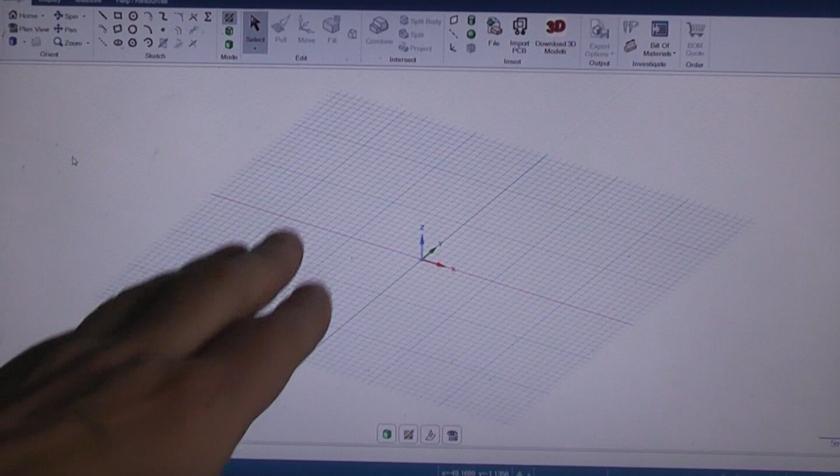When you open the file, you're going to come to this page. Go to File, then New, Design, and it gives you this grid pattern at an angle, which I find totally useless. So I hit Plan View, which gives me this.

In this case, let's go ahead and model one of the arms on this TV robot that we've been talking about. You're going to need something to measure with. I use a caliper. Maybe if I turn the room light on, that would help see the part better.

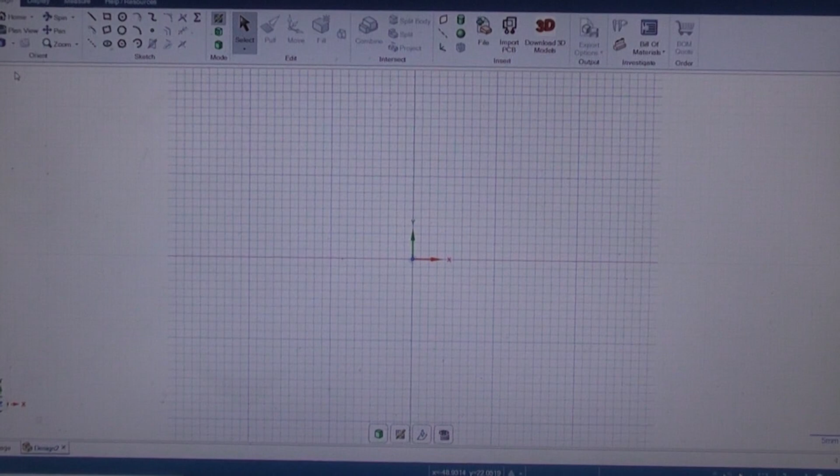So let's just go ahead and start with a diameter reading here. It's about 24.5. So I'm going to go up here into this tools section, grab the circle. Doesn't matter where you start. I'm going to go there and say 24.5, this is millimeters in this particular case.

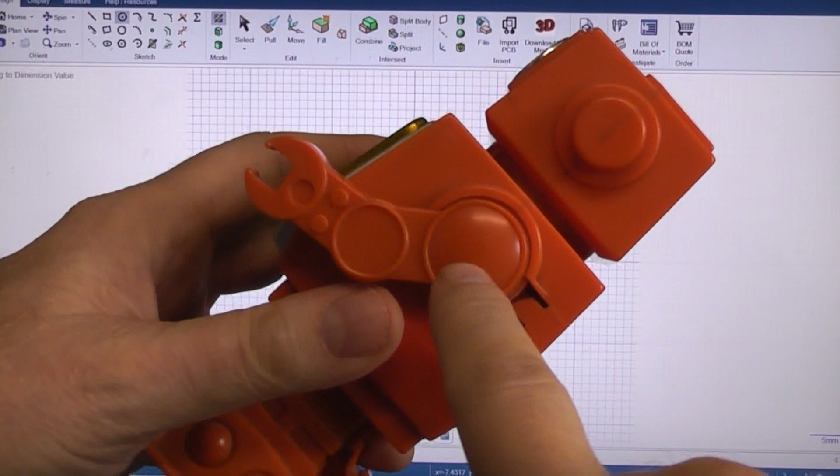The next thing I want to know is the center distance from this circle to this one, roughly, since I'm just trying to make an approximation. About 24 millimeters. So let's grab the line tool and just tell it to go 24. I'm hitting enter to enter that stuff. Now I'm going back to the circle tool.

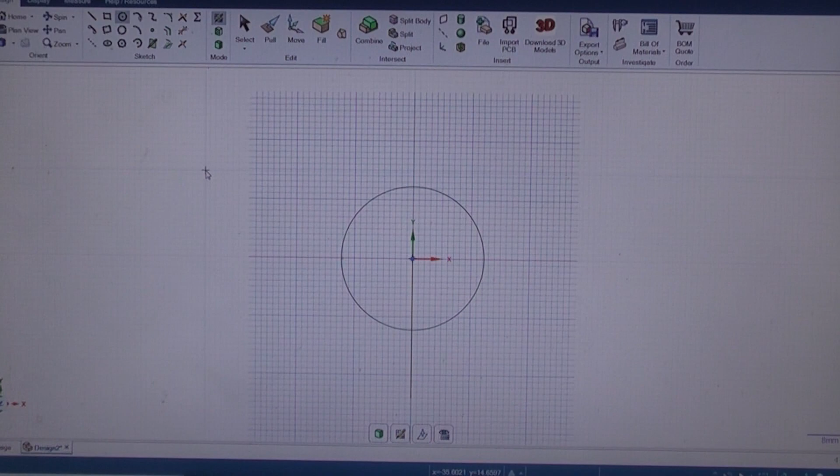So you start by doing a flat line drawing. The diameter of this elbow joint is 19.5, roughly. So I'll go to the end of that line we just made and go 19.5, like so.

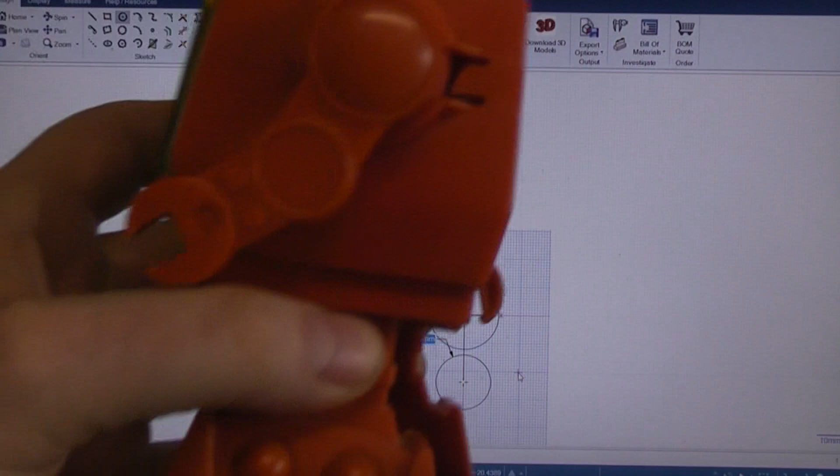The next main detail on this thing is going to be the claw. So let's figure the center on that. It's about 25, and you could get precise on this angle here by taking a measurement and intersecting the two to get them to hit exactly, but I think I'll just guess at it because I don't particularly care if the cosmetic angle is exactly right.

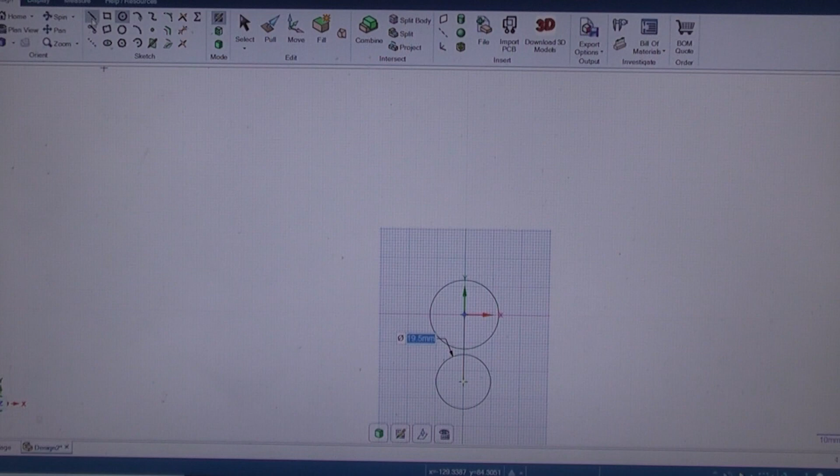So I'm going up to the top and selecting the line tool again, and I'm just going to draw it off down. Let's see what it looks like. Like that, let's just go about there. 25, okay.

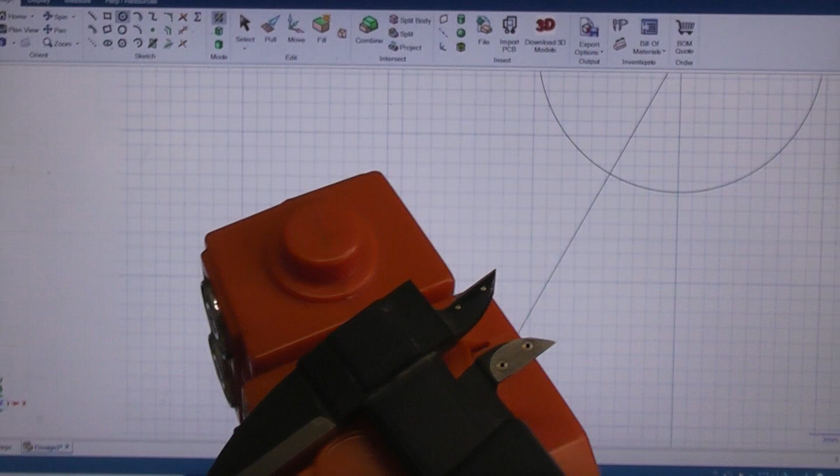Let's go back to the circle tool. And what diameter is the claw going to be? It's about 19.5, about the same as the elbow was. 19.5, like so. So now we have our basic shapes.

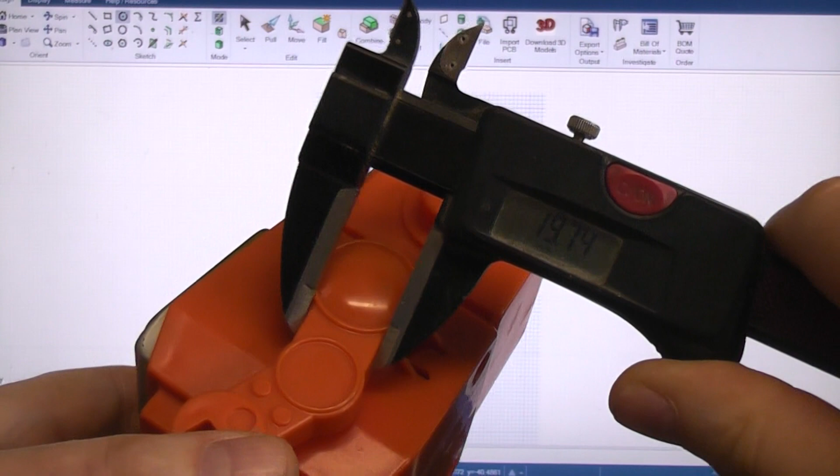Let's see how wide the arm was between the two circles. It's about 17.4, 17.5. Half of 17 would be 8.5.

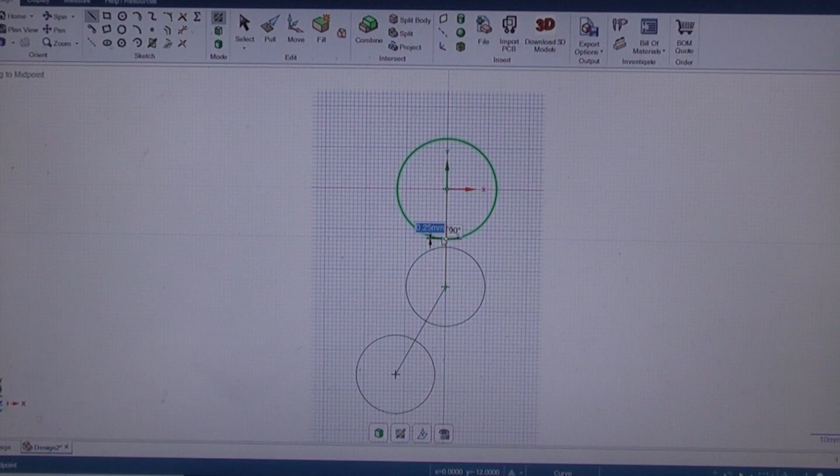So let's go 8.75. What we're trying to find here is, coming off that line, I'm going to take half of that, which was 8.75. That gives me a distance there. And I'm going to do the same thing over this way: 8.75, like that. So now I know how wide that arm is going to be.

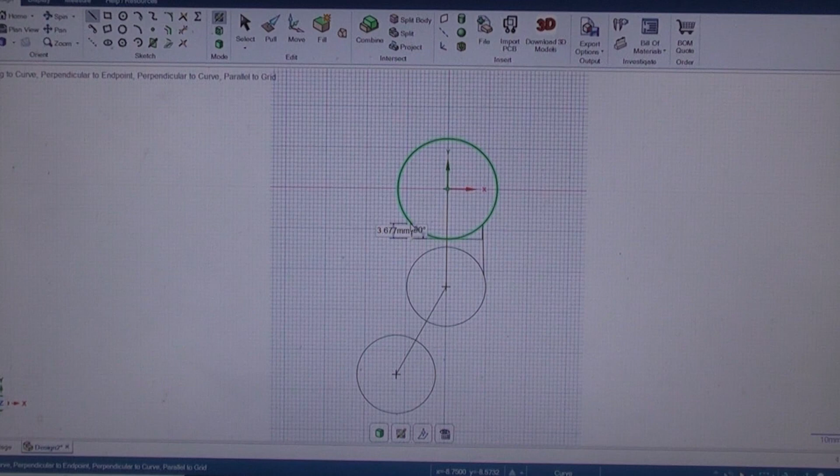I should be able to go straight up and intersect the circle, take that and come straight down and intersect that one. Good. Take this one, straight up 90 degrees, and straight down like that.

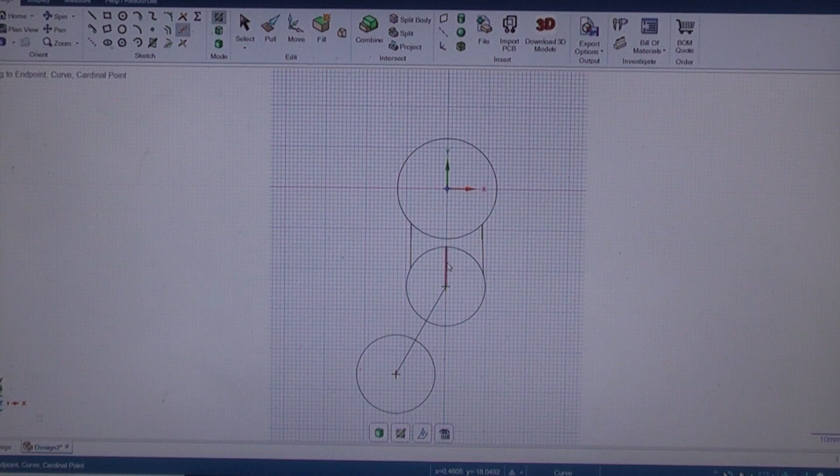Now you can do some cleanup. You can take this tool right over here in the middle of these last three, you can see it's trim away. So I can get rid of these measurement lines, we no longer need those. Now we're starting to get this, and I got a duplicate line here I can get rid of.

Boom, there we go. And let's do the same thing going down to the claw. So how wide was that going down to the claw? It's about 15.5, so 15 would be 7.5, so 7.75.

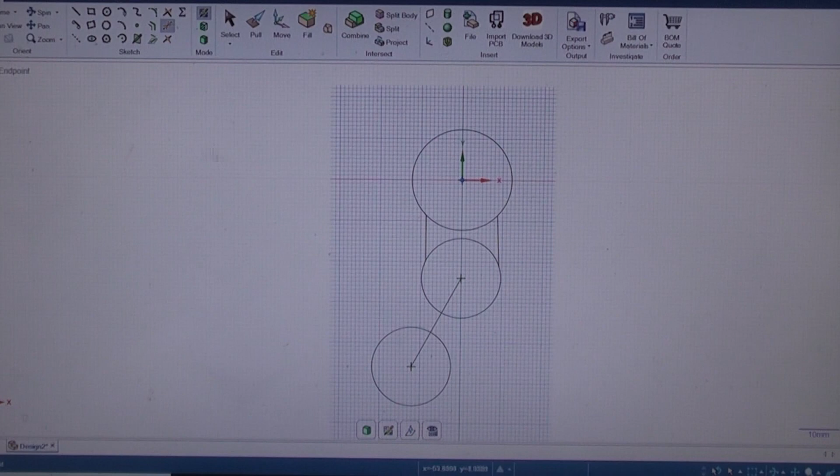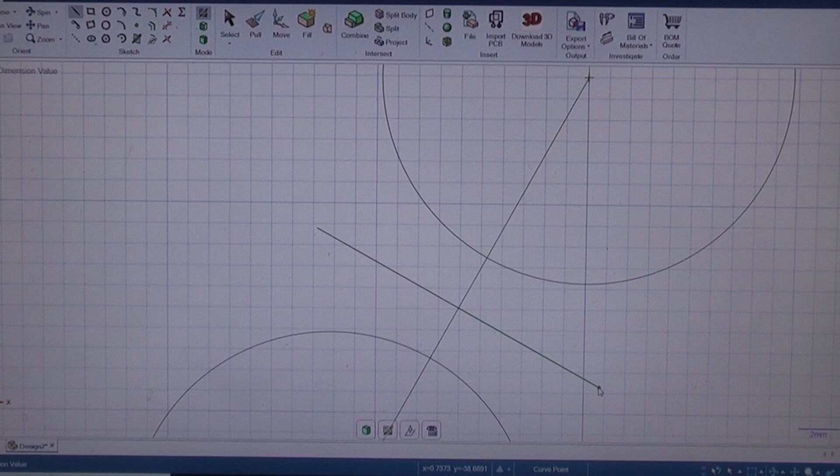I'm grabbing the line tool again, and I'm just going to take this and go at a 90-degree angle off there, 7.75, and I'm going to go from this center and do the same thing in this direction, 7.75, and then I need a 90 degree up to there, and let's take a 90 degree down to here.

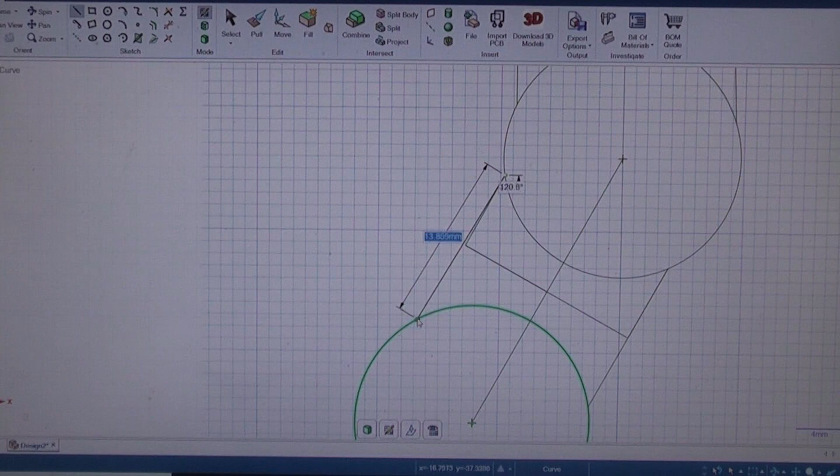Go here, see, you just start with a flat drawing. If you're trying to imitate something, you spend more time getting it right. If you're creating something new of your own design, you don't have to spend so much time getting it right, because you're not comparing it to anything else.

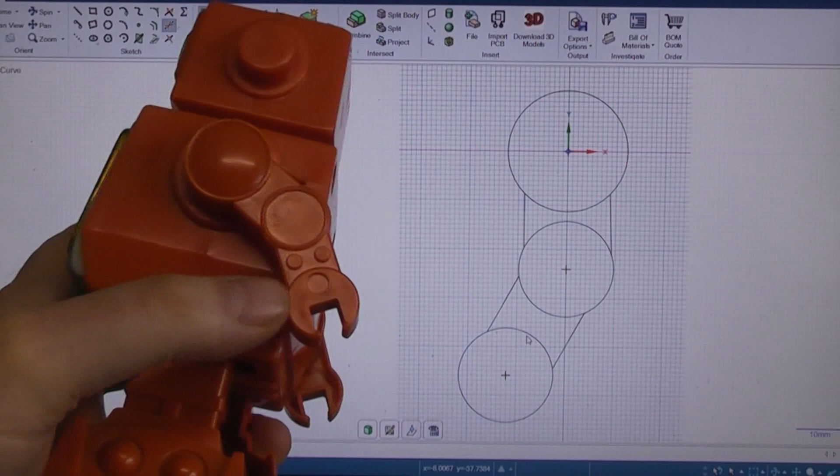So I can clean up all of this, like that. Now we have the basic arm design. We could add this claw cutaway, so let's see what that is. The micrometer says it's 7.8. Let's just call that 8.

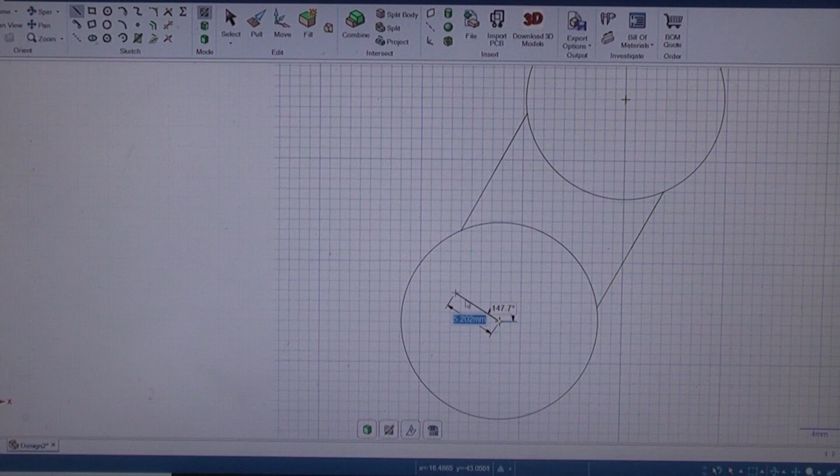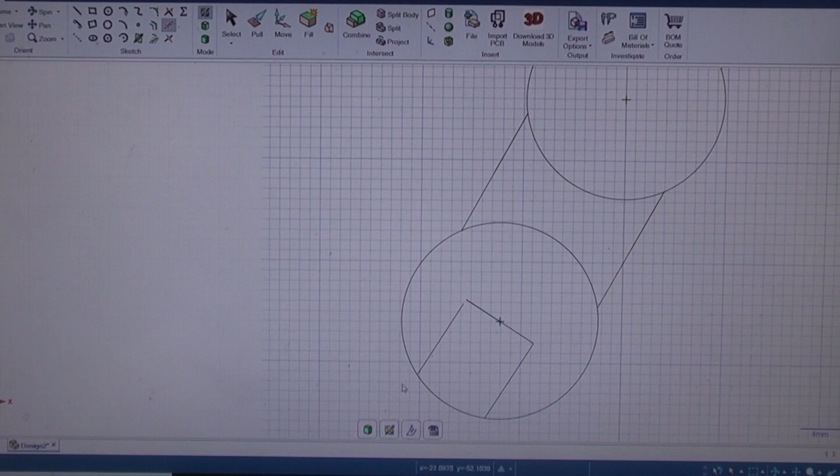From the center, if we do that, then eight, so we'll go 4. Let's go 4. Look at that, and then come straight out at 90, like that, so you can get your degrees that you're going there. There we go. Then let's take the remove tool and open that up. Boom, just like that. So we could do more now.

We could add some of the details, but before we do that, let's just go ahead and extrude some of this. So I clicked out of where we were there. I hit mode and I hit select, and now we're down in this area. Apparently I have a line not touching. I think it's right there, or this would have been gray.

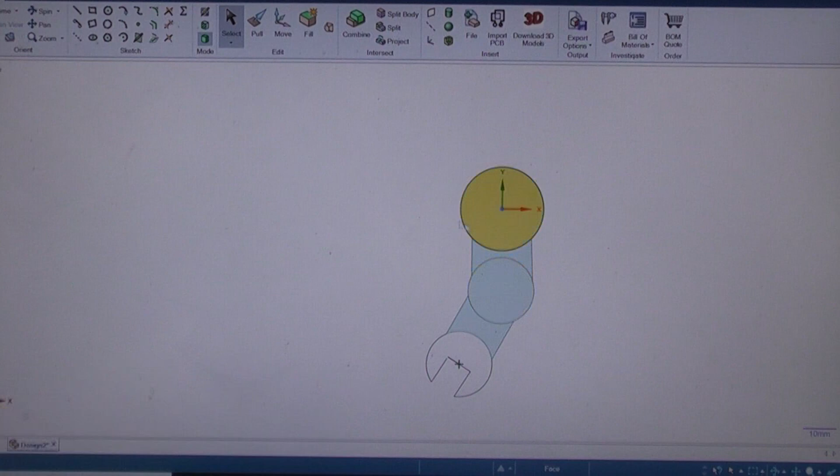Well, what the hell, let's fix it right now. I'm going to use this back button, clear up in the top, there's a back button. Yeah, see, there's where I screwed up. I didn't connect. You got to make sure everything is watertight and connected. Okay, there we go. Anyway, let's go back where we were.

I've just clicked on this upper shoulder circle. I'm going to take this spin tool and rotate it just a little. Then I'm going to turn the spin tool off and come over here to pull, and now we can extrude that.

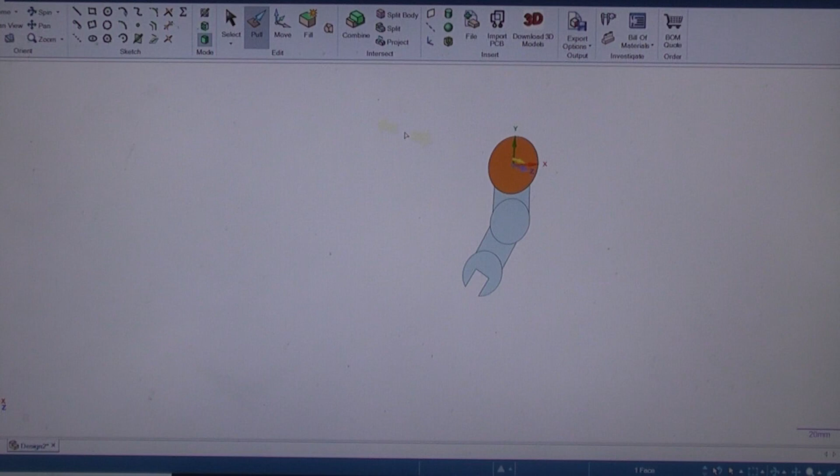And the question is how much do we need to extrude that? It looks like it's 10 millimeters. So let's go ahead, there's arrows pointing, got this here. I'm just dragging my mouse this way. Went up to 13. I don't care what it goes to because I'm going to type in 10 and hit enter. Boom, you got 10.

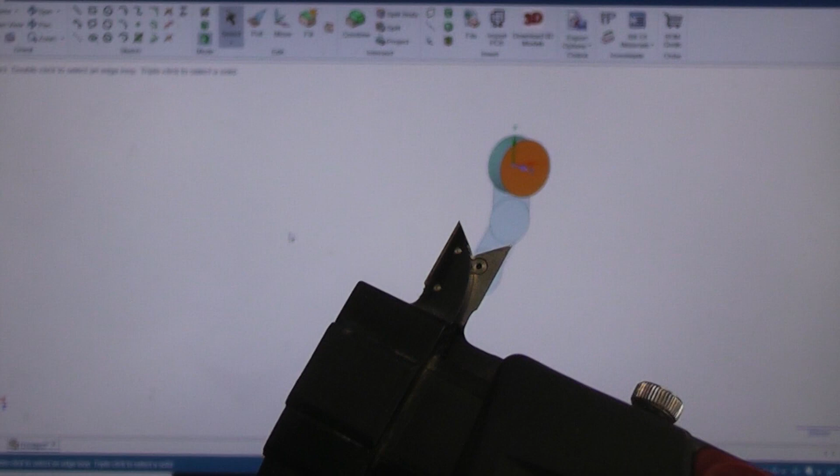And the arm connection is definitely less, in between the arm parts, 8.5. So again, I'll just click on this area right here.

Let me close in maybe so you can see better. Click on that, I'm going to go up to pull. I'm going to say pull, 8.5. So now what's at a lower elevation? I'm assuming...

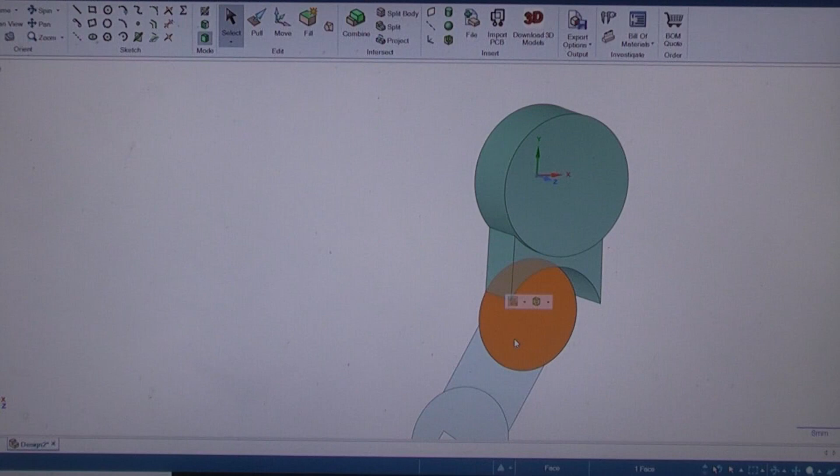We're going to add some detail to the arm. So actually, I can pull that elbow at 8.5 also, and they'll both join together, like that.

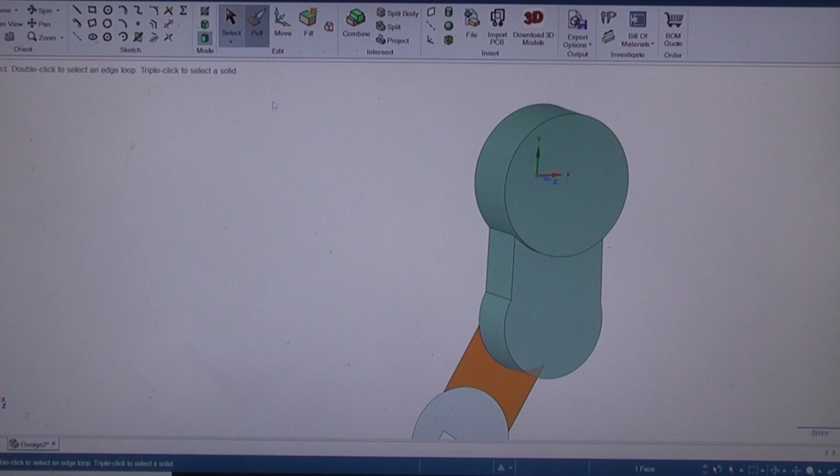And do the same thing down here, 8.5.

Let's stop there for a moment. I'm going to select this whole thing. I'm going to come over and hit this box to get everything flat, coming back up to circle.

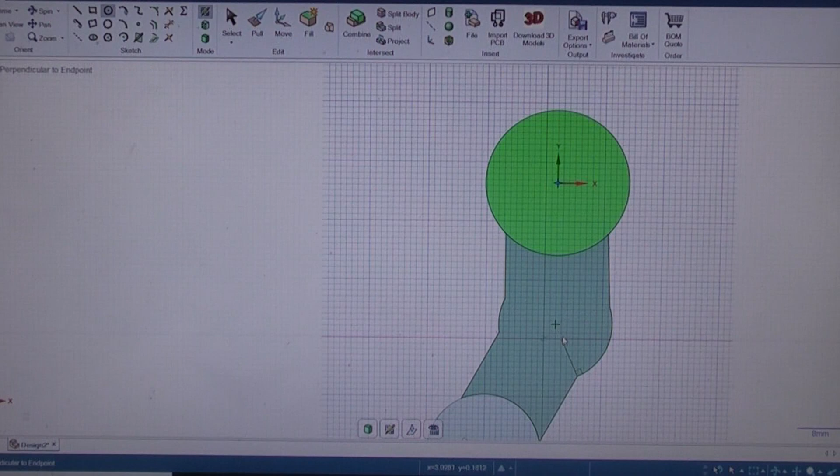Grabbing this, it'll center itself. I'm going to bring this out because we have this ring in the elbow, as you can see, and it's going to be less than the 19.5 that we initially had.

Let's just see what 18 looks like. That looks good. And we want another one, so let's go 16 maybe, see what that looks like. That looks good. That's going to add some detail to this part.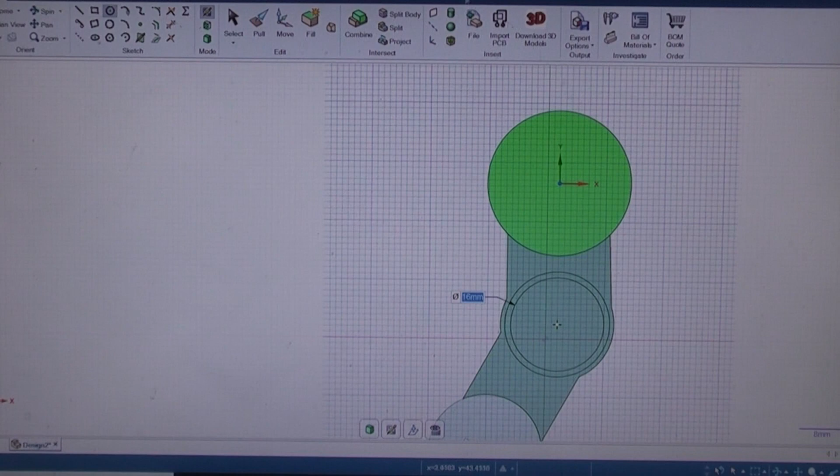We're going to extrude that out, so let's bring this up. I'm going to highlight just that part. I'm taking the spin, rotating it enough so I can pull, going over to pull.

Now let's pull that out, let's say 1.5 millimeters. We just want to add some relief. That's actually too much, let's say 1 millimeter.

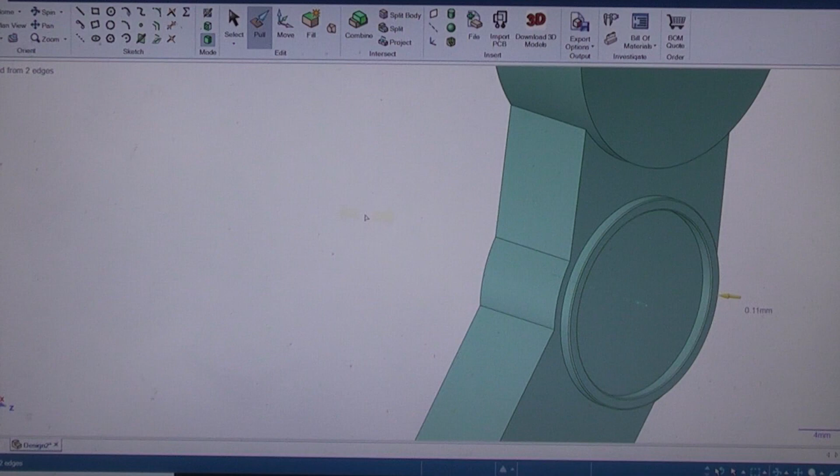Now to give it a more rounded look, you click on the edge of it instead of on the flat. See, if you got on the flat, the whole thing turns yellow. Get on the edge, and I can actually get on the inside edge also at the same time. Now when we click on the pull tool, it shows I can push in, and if I push in, I can round everything over. In this case, I'm going to go 0.5. Boom, like that, and now we have a nice rounded view there.

Now we should do a similar thing up here on the top. I clicked on that surface to select it.

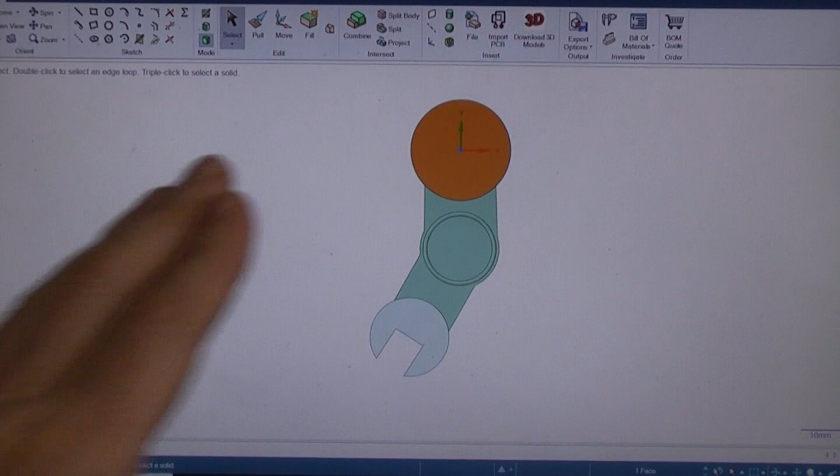I'm coming down here to move that whole thing square so I can look at it straight on. Let's make this bigger, and we're going to add a ring to that as well.

We'll start by noting the outside ring was 24.5. Let's go something like... gee, I don't know, 21. That's a little too hefty. What's 22 look like? 22 looks pretty good. Let's take that.

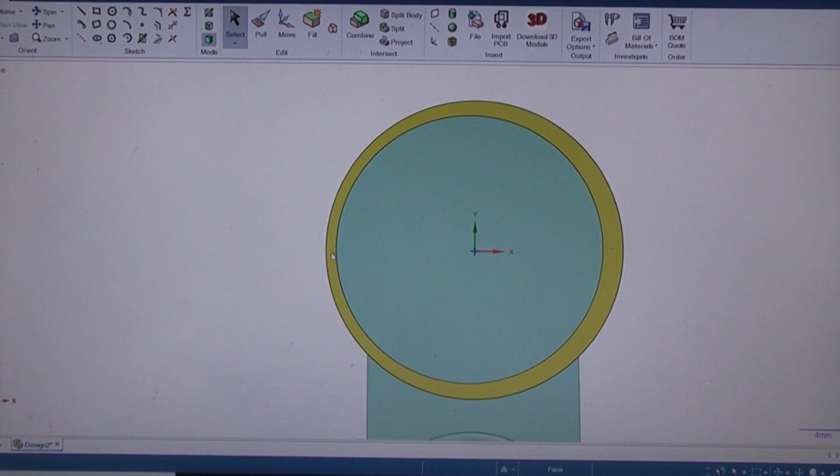When we did the depth, I think we went full bore already. So I'm going to select... ooh, I'm not centered, am I? Let's go back, I wasn't watching what I was doing. I don't know how I got off center. Am I centered? Yes, okay.

So let's go back to 22. That's better. Take that. I'm going to take this inside part. You know what, I want to dome that.

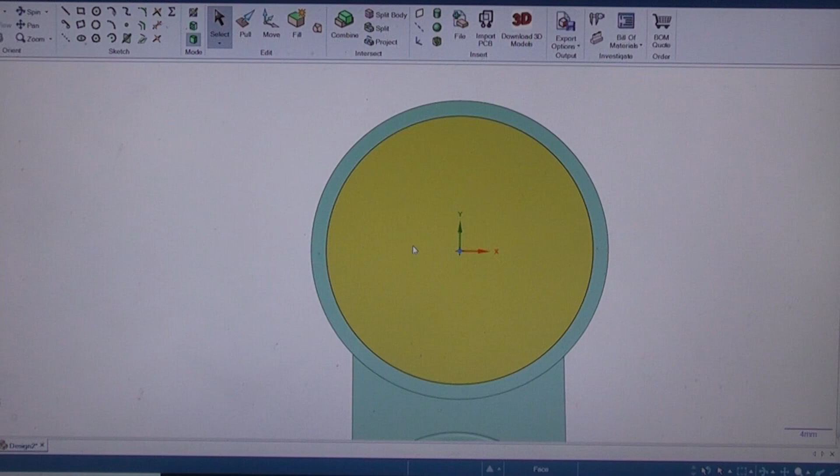So I had that inside one, we're back on the sketch. I'm going to select the circle again and do another circle just inside that. What did I say, that one's 22? So let's go 21.5. I need just a ridge there.

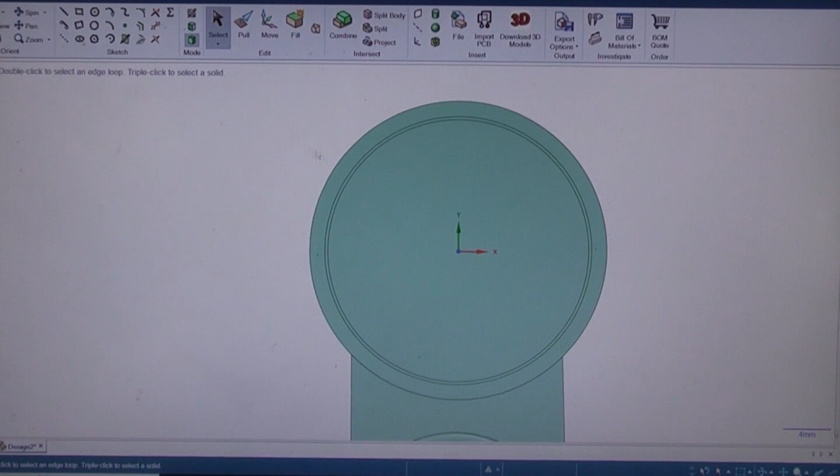Then I can select the center and let's go ahead and rotate this a little. Let's just grab... I'm clicking out here anywhere to unselect. I didn't get the spin off. I'm clicking spin off, clicking out here just to unselect.

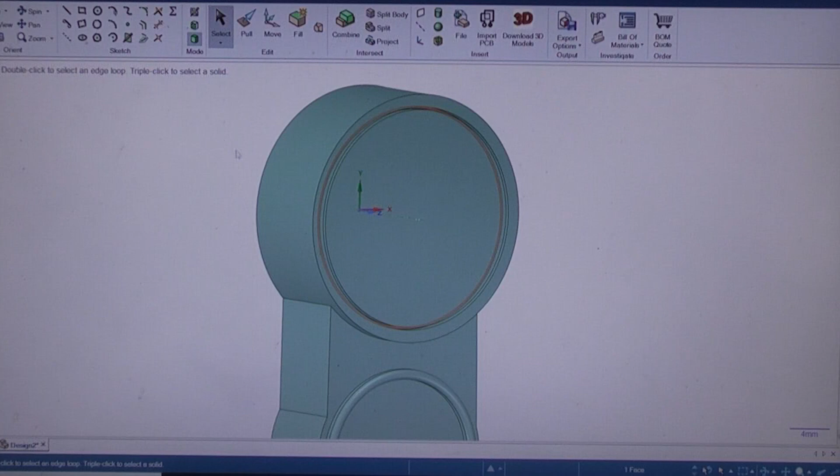Let's grab this inside edge. In fact, let's have more fun with it. Let's grab this whole little piece in between that we just made and pull that in, oh, I don't know, at least one. If we don't like the way it looks at one, we'll add more later. So what we've done now is pull a ridge in there.

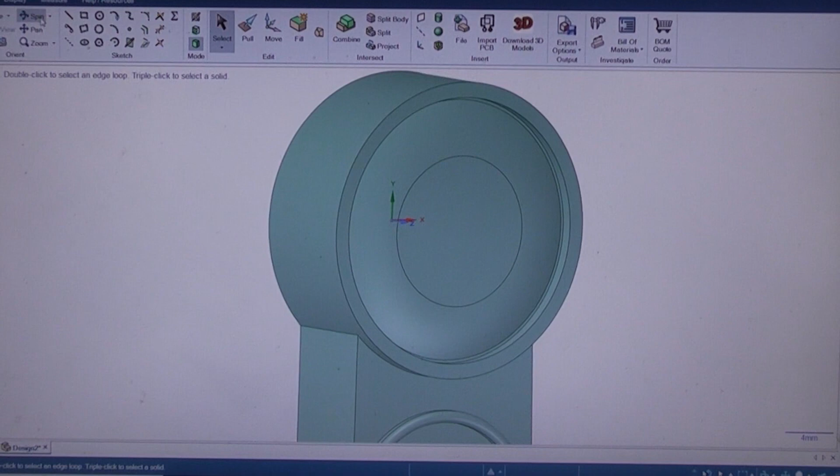Let's select this edge. What I'm trying to do is round this, because this thick part here is domed. I've grabbed that, there's a little arrow pointing in, I've got a little arrow here, I'm in the pull mode. I'm going to push in, and it's going to keep pushing in, until it looks kind of rounded. Couldn't go as far as I wanted. So now you can see we've got a domed round part in there.

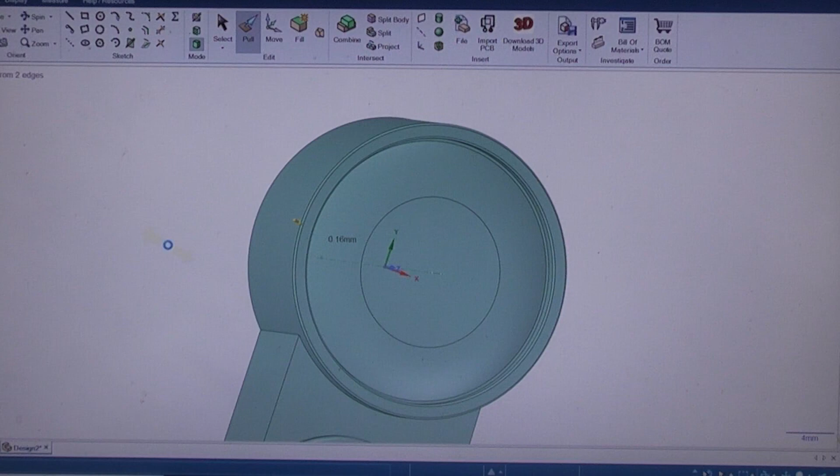We've got these outer ones which still have a very coarse edge to them. So let's grab that outer edge, and by holding the control key down, I can select this inner edge, and then let's round those by pushing it in. Something like that. So now we've got a rounded edge, we've got the domed edge, we've got this edge.

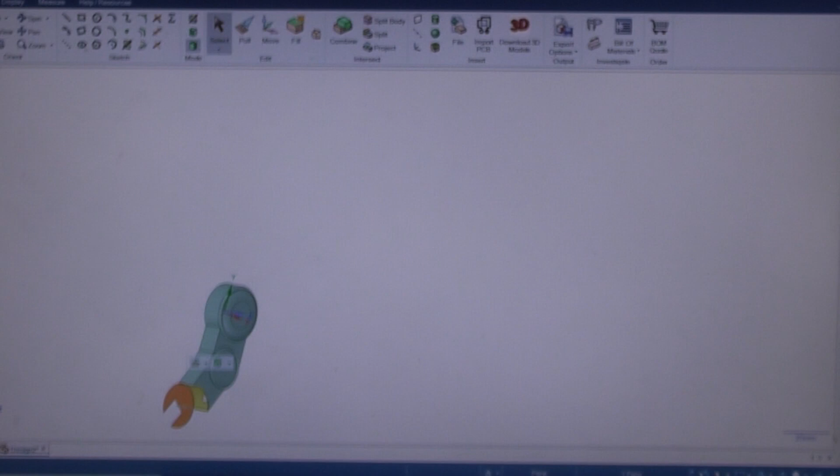So that means we could come down to our claw. Now it looks like the claw sticks out. It's a little bit thicker than the arm part was, so we'll call that 10. So let's go ahead and select pull. We've already selected it, let's pull that out, 10. Boom, like that. That's looking pretty good.

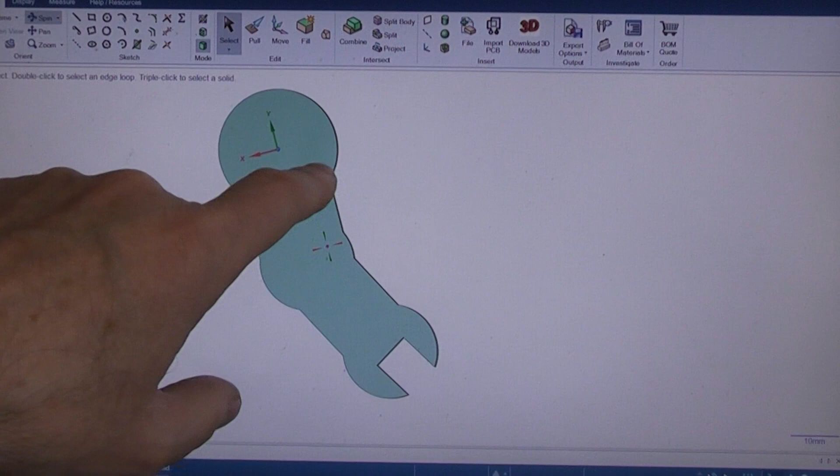I'm hitting spin so I can take you guys around the part. So right now it's a solid part. If we didn't want it solid, if we wanted a hollow part, I would redraw this outside line in here, but I would make it whatever wall thickness I wanted. Let's say I wanted it 1.5 millimeters thick, then I'd go in with a circle that's less and straight arms, and then I could go back and pull that in and make it hollow.

In this case, I'm going to go ahead and leave it solid. Since this is going to be an FDM 3D print, I can just set the infill at any level I want. If I was going to make this part on a resin printer, I would want to go ahead and make it hollow, since resin printers make their parts solid.

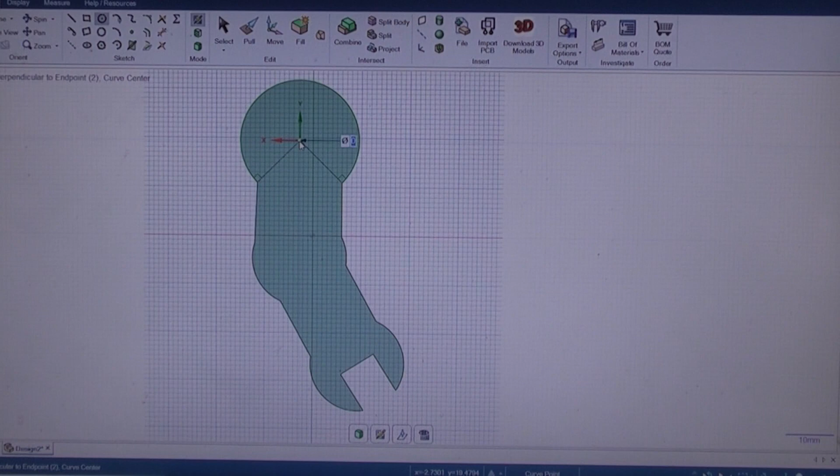But I need a way to connect this. So let's put a 10mm hole in this so I can hook some sort of axle to this arm to hold it onto the robot. And let's just go ahead and pull that in arbitrarily, let's say 5mm, about half the distance of the arm.

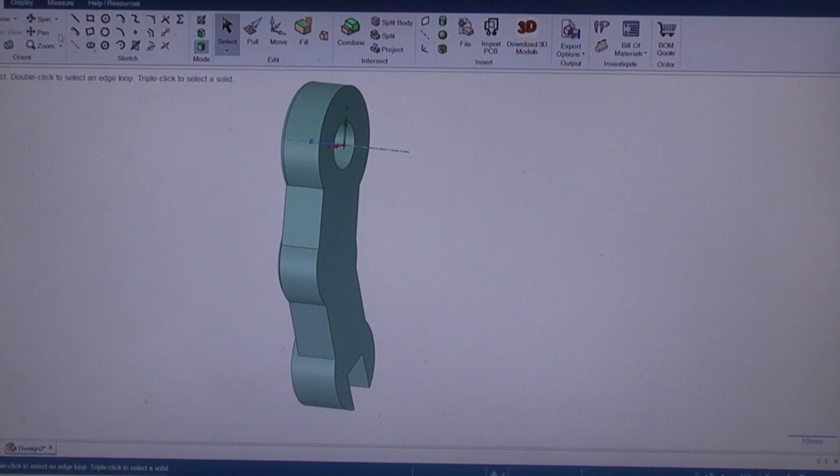And I'm hitting the spin button so I can spin it for you. So now you can see I've got a place where I can run and glue a pin into this whole arm part. And if I wanted to add the more details that are supposed to be present on these parts, there are a couple little circles and then the one circle in the claw. Let's select this part here.

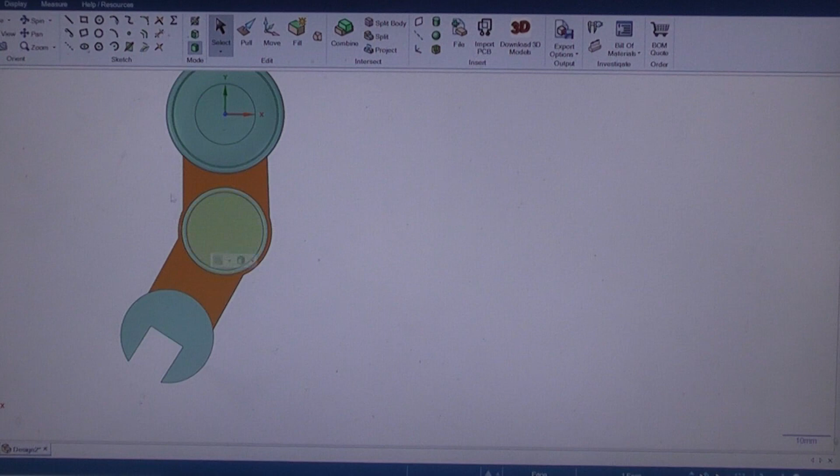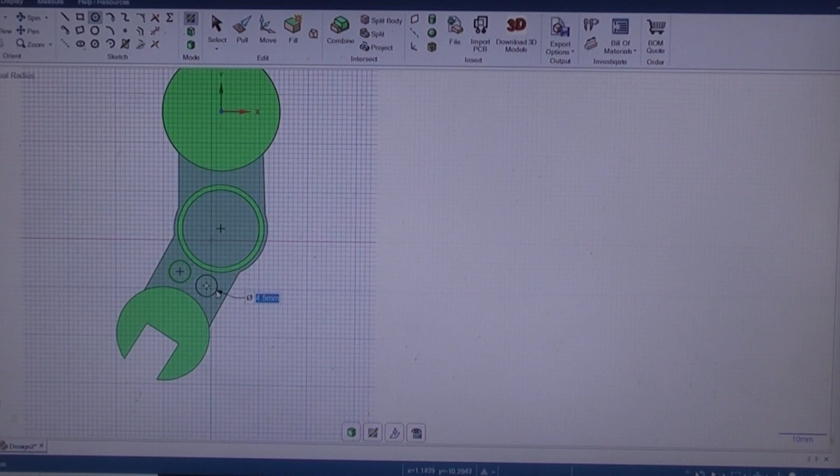You could measure and get exactly where you wanted to add those other two circles, or if you just want to be artistic, you can guess at something, like I'm going to do right now. Let's just say 4.5, and then your other one, 4.5.

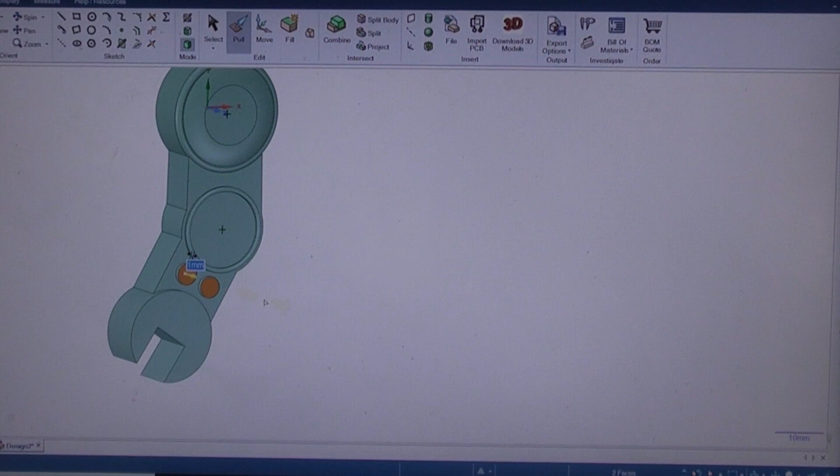So I've drawn those two circles in. I've gone back to select mode. I can now select those two circles. In this case, they protrude outward on the arm, so I'm going to rotate the arm a little to make it easier to see when you extrude. Going up to pull, they're both selected. I'm going to tell it to bring them both out 1mm. Maybe I'd like more, but let's go ahead and leave it at 1mm for now.

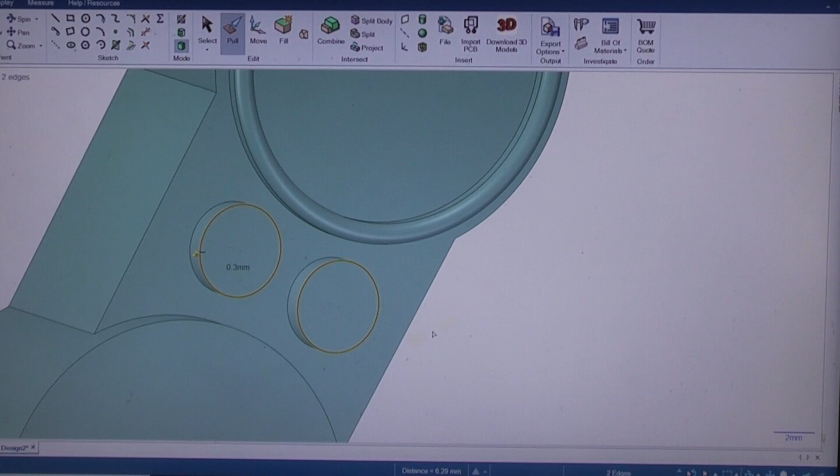Now if you wanted a rounded edge on those, you can come up and just hit the edge of them. See how the edge is now highlighted? Then if you go back up to pull, you can see there's an arrow pointing in, so I'm going to push on my left mouse button as I go in. I can select how much I want to go in. Let's say 0.3mm. Boom, like that. That's more than I would want, but in this case I don't care.

And let's click on the arm. I'm going to click on this box over here to get the whole thing square on, like that, because there's this circle in the claw down here, so we can take that.

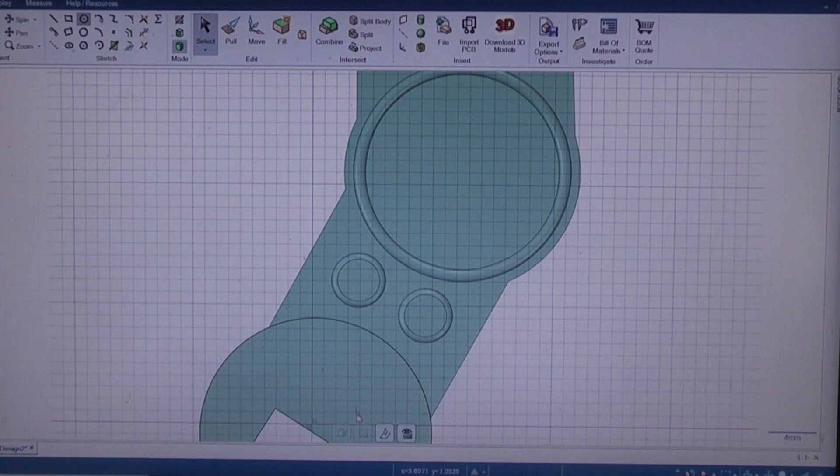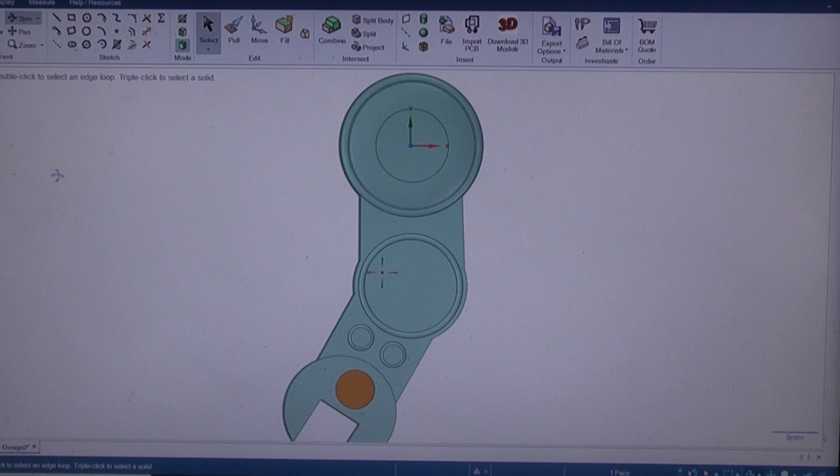You'd find the center - of course, you could measure to exactly find the center - and the circle is kind of big. I'd say it's about there, can take that. I clicked on select, I clicked on mode, I'm clicking on that, I'm hitting spin. So now I'm pulling on pull. In this case, that hole goes inward, so I can go in, let's say 1. I think I'd actually probably go more like 1.5.

So now we have all of that detail on there. And the robot in this case actually has two little divots down here, so I could select the surface, add the two divots, and extrude those on.

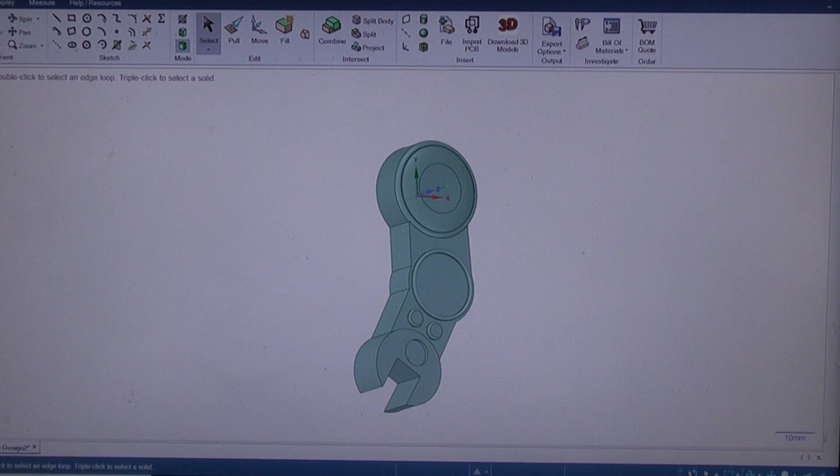You get the idea. When you're all done with your drawing and you're happy with the way everything looks, you would go up to File, hit Save As, and just like in any other program, you would look for where it is you want to save it, type in the name you'd want to save it, and the first file type it's going to save it as is a DS mechanical file.

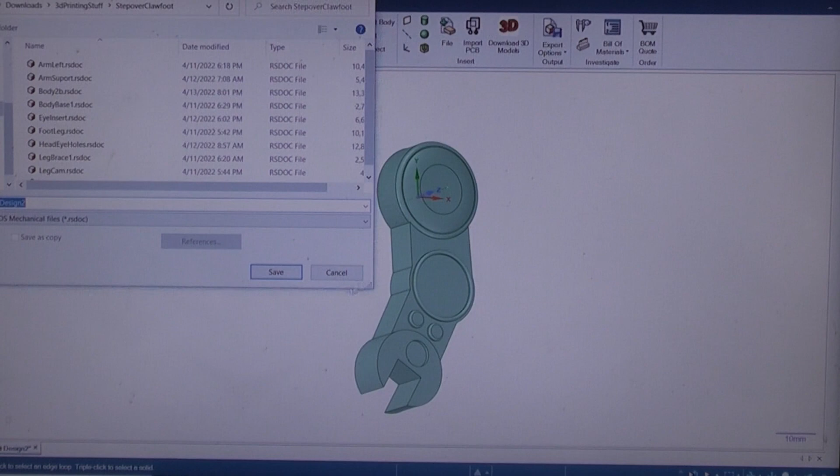Just hit Save, then you can go up and do a save again. Or you can just go over here under exports and go down to STL and save the file as an STL also. So once you have it saved as an STL, I'm going to close out of here.

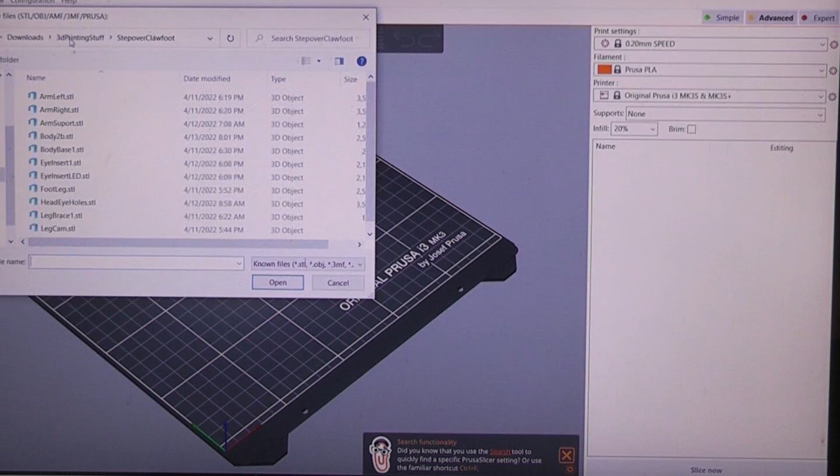You would go into your slicer. In this case I'm using the Prusa slicer because it'll work with any printer and it's just about the best slicer out there. And in Prusa you can come up here to this box, click on that, and you can find what you're looking for. You got an arm - there's an arm, it's laying there.

As you can see, in this case, because I'm not particularly worried about layer lines and stuff, I normally just print at the 0.2 speed setting in their slicer. It's quick, 20% infill, it's going to be a lightweight part. You would hit Slice Now - boom, just like that.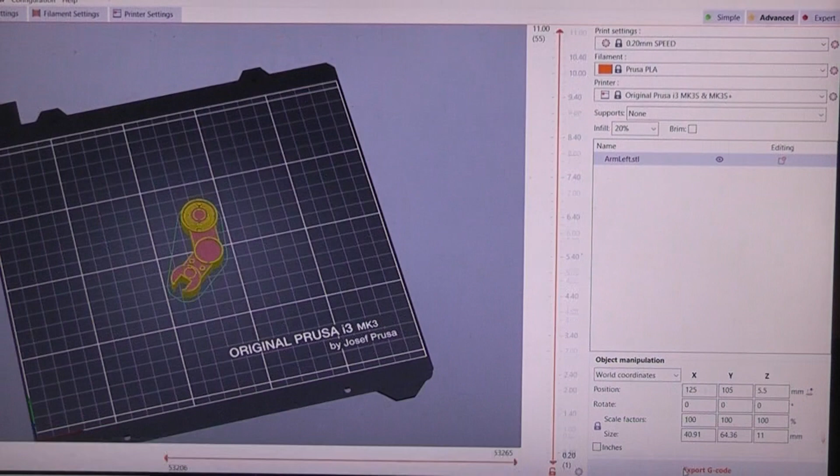Now it's sliced, then you would click on this, Export, save the exported file, and you're ready to run it to your printer, assuming that you had your slicer set up to match your printer. In this case, I have the slicer set up for my Prusa MK3 printer, so it would be ready to go. It gives you the specs over here - it's going to take 34 minutes to print. And that's pretty much it.

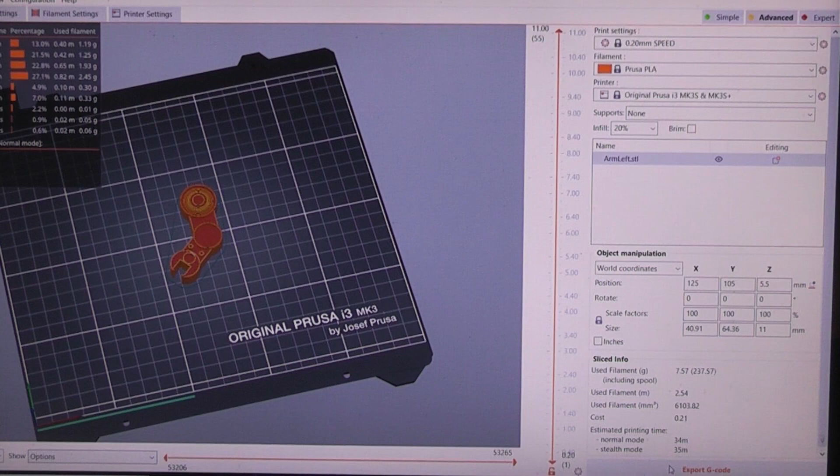In case you guys were wondering how the parts were made, I thought I'd do a quick video showing you that.